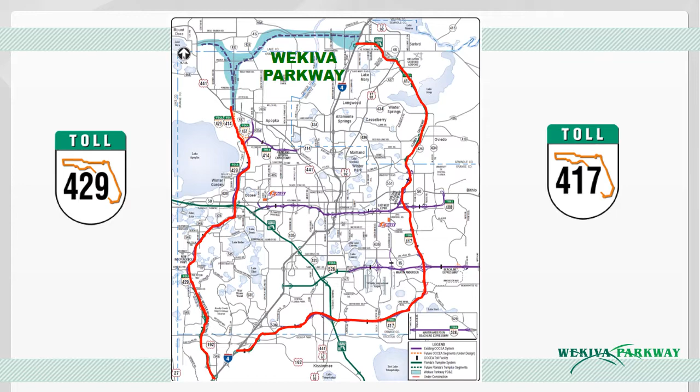The $1.6 billion Wekiva Parkway, a 25-mile toll road, is being developed by the Florida Department of Transportation and the Central Florida Expressway Authority. The Florida's Turnpike Enterprise will collect the tolls on the FDOT sections. The Parkway will include a number of non-toll road improvements, including the sections we're focusing on tonight.

The agencies will be widening about 7 miles of State Road 46, rebuilding the US 441 State Road 46 interchange in Mount Dora, moving part of County Road 46A out of the Seminole State Forest so wildlife can move safely between habitats, and building parallel, non-tolled service roads for local travel. The department also will be including a multi-use trail along much of its portion of the Parkway.

The Parkway is expected to help spur significant economic development, including creating nearly 36,000 jobs, both directly and indirectly, during design and construction.

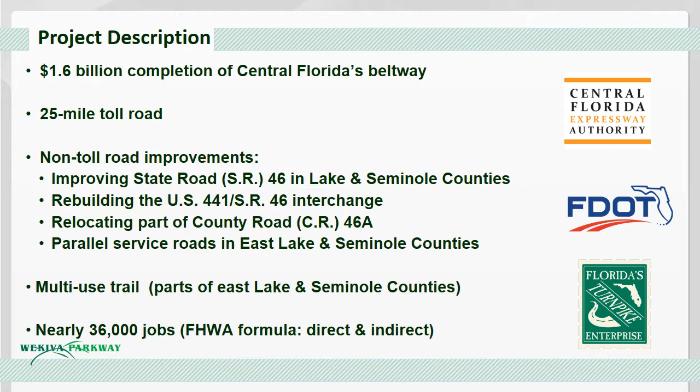The Wekiva Parkway represents a unique transportation solution that also helps to protect wildlife and other natural resources in the Wekiva River Basin. The agencies have diligently adhered to the 2004 Wekiva Parkway and Protection Act, including buying 3,400 acres of land for conservation and planning 4 substantial wildlife bridges. The Parkway will have a minimal number of interchanges. The idea is to reduce the amount of related development in this environmentally sensitive area.

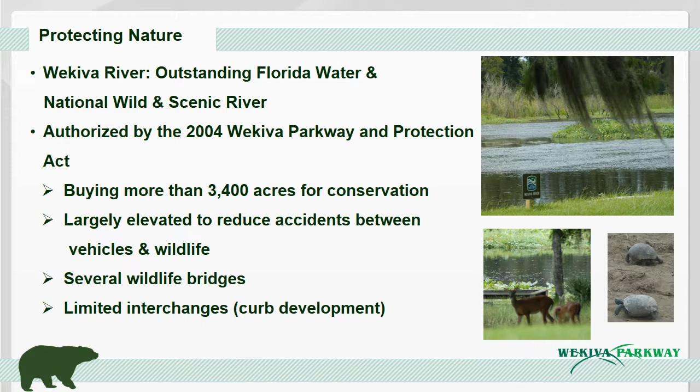Some of the environmental protections can be seen here on the first sections of the Parkway, sections 4A and 4B. On the right is a wildlife jump out that will allow animals who wander onto the corridor to safely exit. On the left, bat houses provide shelter to as many as 1,200 animals each. The floodplain bridge in the middle of this section during the dry season allows animals to pass under the Parkway safely. Wildlife fencing is 10 feet tall with 2 feet underground to discourage animals from digging into the corridor.

This section opened on January 20th, 2016. It was built on one of several large parcels that were purchased for conservation as required by the 2004 Wekiva Parkway and Protection Act. Lighting will be installed only in limited locations along the project to preserve the natural look and dark skies initiative for this environmentally sensitive area.

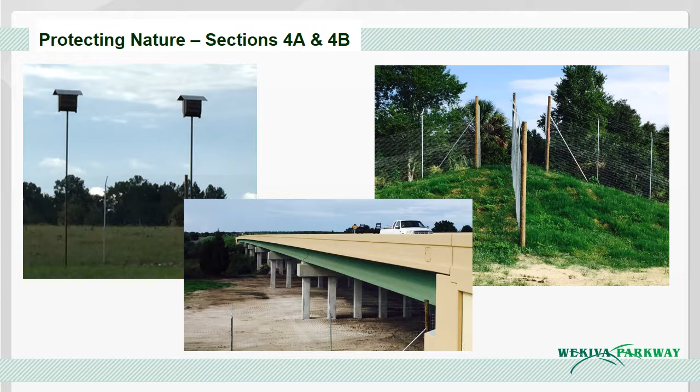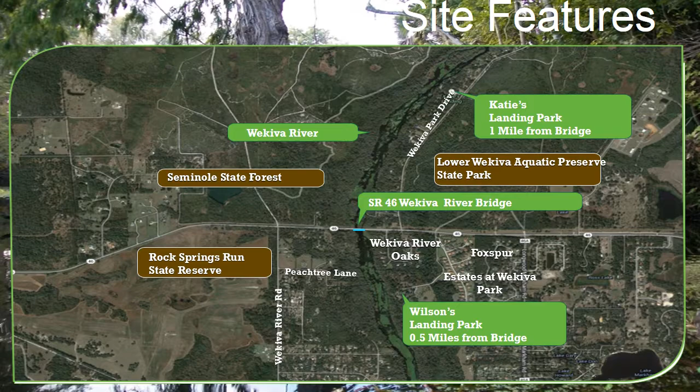The Florida Department of Transportation is developing a trail that will parallel about 10 miles of the Wekiva Parkway. The trail is being built as part of the overall construction on sections 5, 6, and 7A. A separate project will build the trail along sections 4A and 4B beginning in 2020. Once complete, the Parkway Trail will connect to future extensions of the West Orange and Seminole Wekiva trails, as well as connect to the new Lake Wekiva Trail being planned by Lake County.

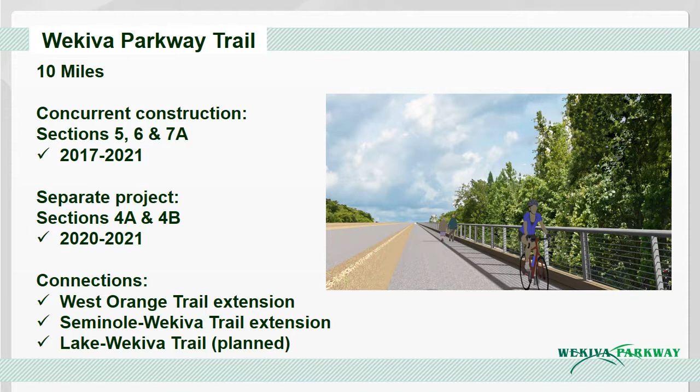The Wekiva Parkway is the first expressway in Central Florida to feature all electronic tolling. There are no toll plazas. You do not need cash on the Parkway. Both FDOT and CFX have programs to accommodate those who do not have a transponder.

All electronic tolling, or AET, enhances safety by eliminating the weaving between different lanes at toll plazas. It also maximizes convenience. Customers pay their tolls at safe highway and ramp speeds without having to slow down or stop. You can find out more about all electronic tolling on the WekivaParkway.com website.

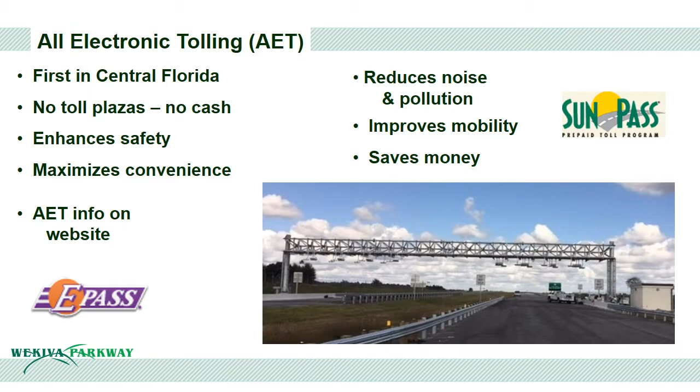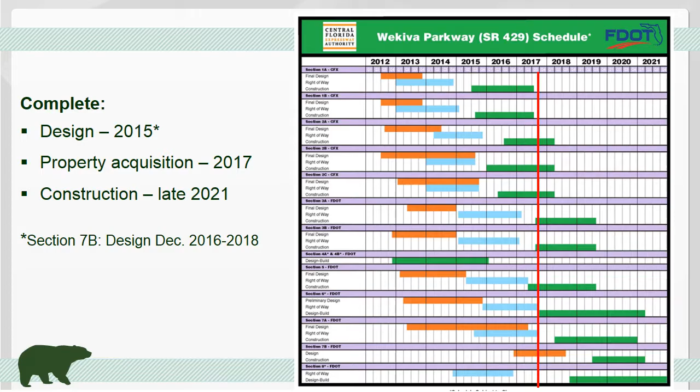CFX is on track to open the next sections in the spring of 2018. Basically, the plan is to have a new section open every year or two until all of the parkway is open to traffic by the end of 2021.

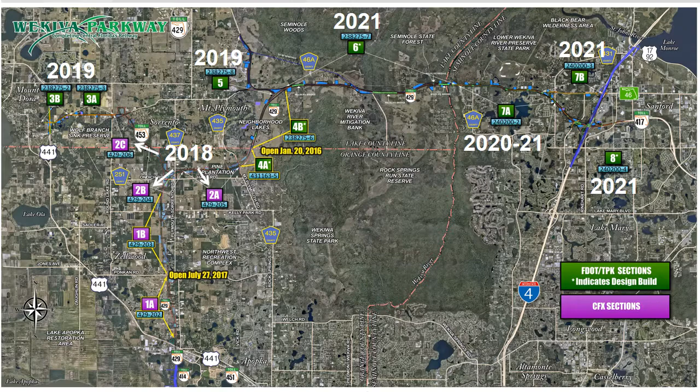So now we'll focus on the construction about to start on the Section 6 Design Build project in East Lake County and part of Seminole County. FDOT anticipates starting construction on this design build project in October, with work scheduled to finish in the spring of 2021.

This $240 million project extends about 6 miles, largely along the State Road 46 corridor from State Road 429 in East Lake County to west of Longwood-Markham Road in Seminole County.

FDOT has hired the firms you see here for this project. RS&H will oversee the daily operations for the department. Superior Construction, the contractor, and its design partners shown here are finishing the design and building the project.

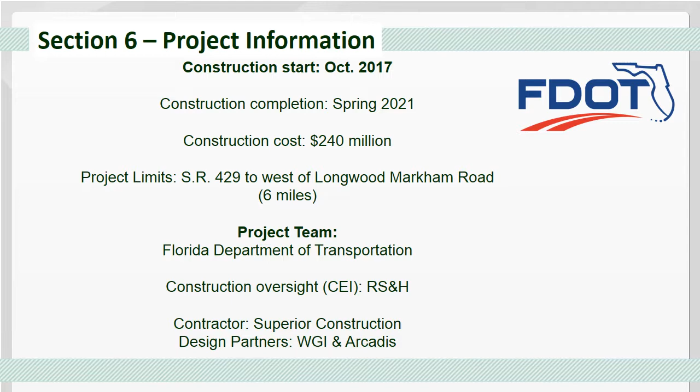Here you can see the Section 6 corridor, which begins in Lake County. Section 6 is the longest Parkway section, at about 6 miles long. This design-build project will largely replace State Road 46 with the elevated Parkway and a parallel non-tolled service road for local trips.

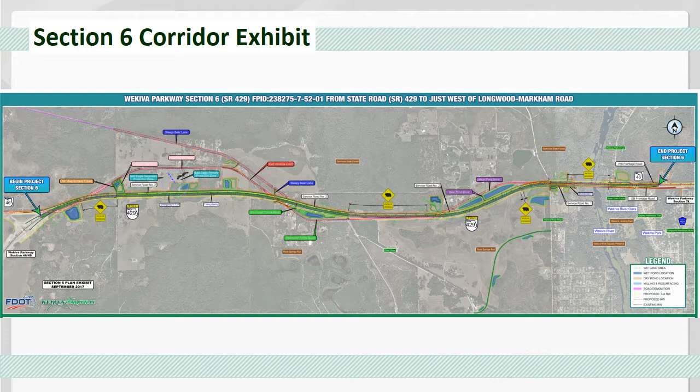The non-tolled service road will feature one lane in each direction. Due to the length of Section 6, we've divided it into two to highlight the various features. This graphic features the west end, starting where it connects to Section 4B or State Road 429, which opened in 2016.

Just east of that interchange, you can see the first of 3 wildlife bridges planned for this section. The wildlife bridges will allow animals to safely cross between the Seminole State Forest and the Rock Springs Run Reserve seen here. You can also see the non-tolled service road on the north side of the Parkway for local traffic.

An all-electronic toll gantry will be located on this section to allow motorists to pay their toll while driving at safe highway speeds. There are a number of short connector roads that will be built as part of this project to maintain property access. The Wekiva Trail will continue along this section.

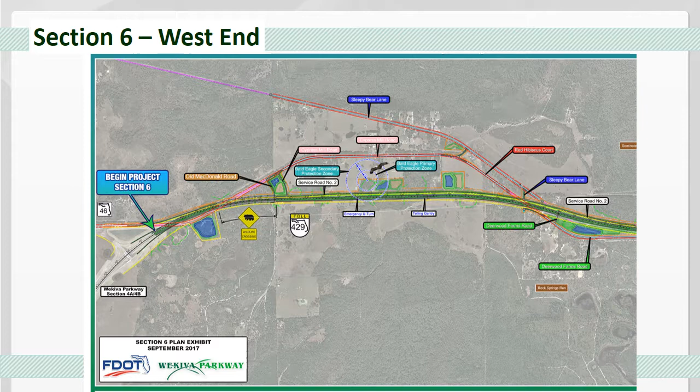This graphic depicts the eastern half of Section 6. Here you can see the 2 other wildlife crossings, as well as the greatly enhanced bridge planned over the Wekiva River. The new river bridge also will provide expansive areas for wildlife to pass safely under the parkway along the riverside.

Currently, the 2 wildlife tunnels on State Road 46 give animals a total of 79 feet of safe passageway. The 3 wildlife bridges and new Wekiva River Bridge will provide 7,700 feet of safe crossing area for wildlife, almost 100 times more passage.

The graphic also shows you how the non-tolled service road shifts from the north side of the parkway to the south side of the parkway at Wekiva River Road. The Wekiva Trail will be alongside the service road.

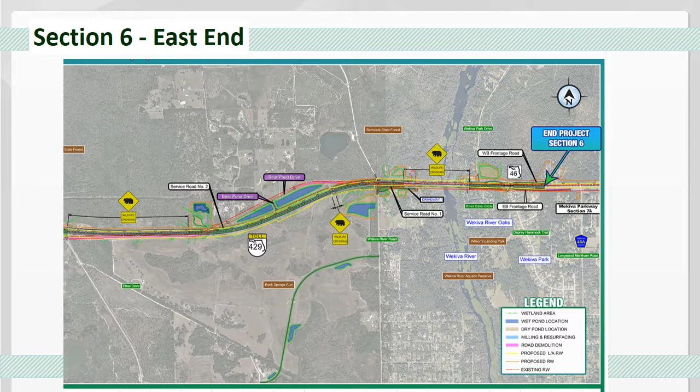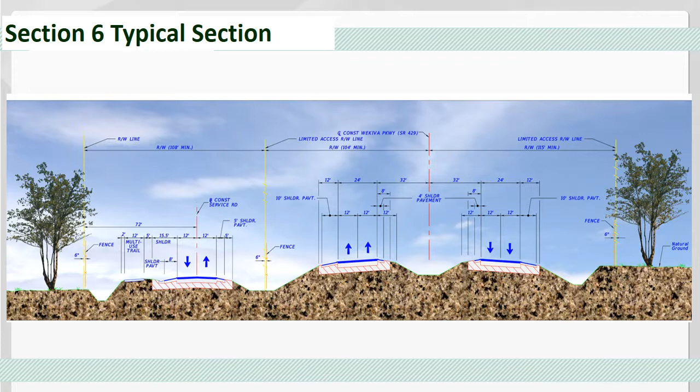The department has coordinated extensively with the National Park Service and other federal, state, and local environmental agencies and advocates to make sure the new bridge over the Wekiva River has a context-sensitive design, that is, one that attempts to fit in with its natural surroundings. The National Park Service in 2015 issued the final environmental permit needed to build the bridge based on this design.

The bridge will have a much higher profile than what's currently there. It will be about 60 feet high so that it is buffered by the tree canopy. The bridge will also have a gentle arch and other aesthetic treatments so that it's more pleasing to the eye. This animation shows a comparison between the current and future bridges.

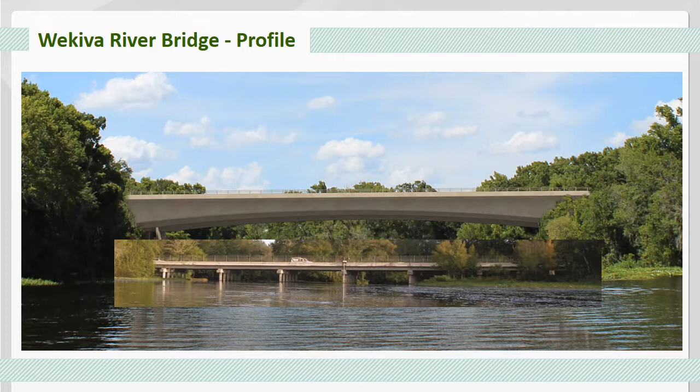This schematic gives you a clearer comparison between the existing bridge and the new one. The existing bridge will be removed. Removing the old bridge piers is expected to improve the river's flow or hydrology.

The greater openness of the new, much longer span over the river will greatly enhance the recreational experience and provide much greater and safer passage underneath the bridge for area wildlife.

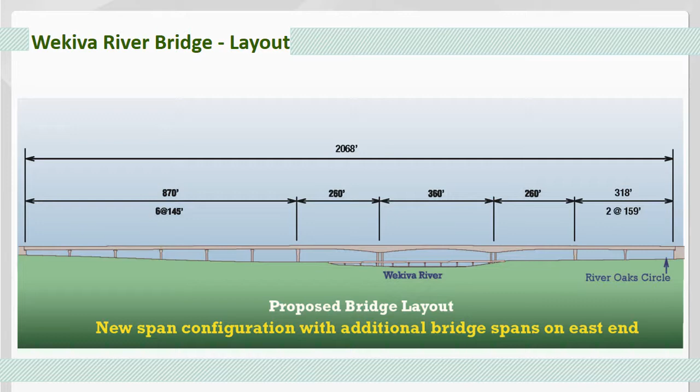This image gives you the river user's view of the planned bridges. There will actually be 3 bridges crossing the river, one each for the eastbound and westbound lanes of the Parkway, and the 3rd bridge, shown here on the left or south side, for the service road and trail. Also shown are aesthetic treatments, concrete forming mimicking interwoven tree trunks to enhance the experience of those using the river.

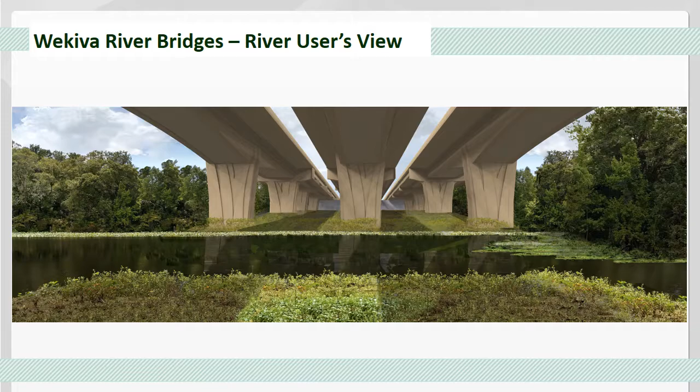The cross-section shows a potential ultimate build-out of 6 lanes. The initial parkway will only have 2 lanes in each direction, or 4 lanes. You can also see the multi-use trail on the service road bridge here on the right.

The top image shows the cross-section at the middle of the main span. Note the shallower bridge box structure. The image on the bottom shows the deeper box structures on the ends of the bridges where the piers will be located. This will give the bridge the gentle arch that will be seen from the river.

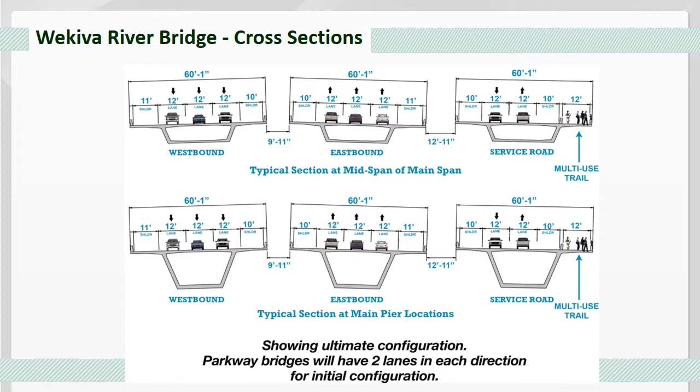The design build team has included some innovations and new features for the project. New scenic overlooks have been added to the plans in 4 locations near the wildlife bridges. The overlooks will provide enhanced opportunities to view area wildlife and habitat. The latest plans also include modified pedestrian railings, again to make it easier to view the natural surroundings. The goal in each case is to enhance the trail user's experience and to provide greater access to the area's state-owned lands.

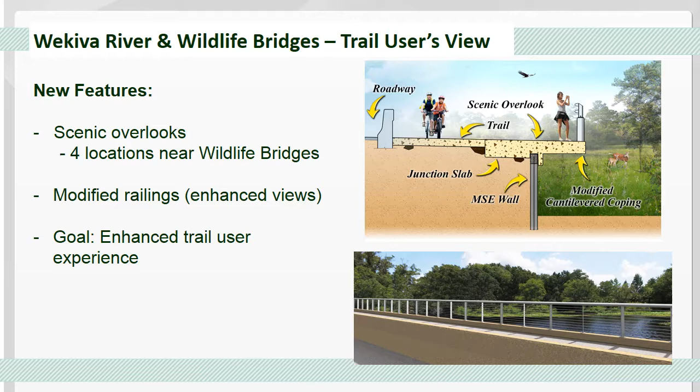The design build team also plans to move the location where the non-tolled service road shifts from north of the new State Road 429 to the south side of the expressway. The previous plan included shifting the service road to the south between the 2nd and 3rd wildlife crossings, the image shown on the left. By moving that shift to Wekiva River Road, FDOT will be able to eliminate that previously proposed bridge and related retaining walls.

The new design also allows room to provide a left turn lane for westbound service road traffic trying to turn onto Wekiva River Road. Removing the bridge also means the expressway can be 2 feet lower in the previous crossing location, reducing the amount of fill needed and also saving money.

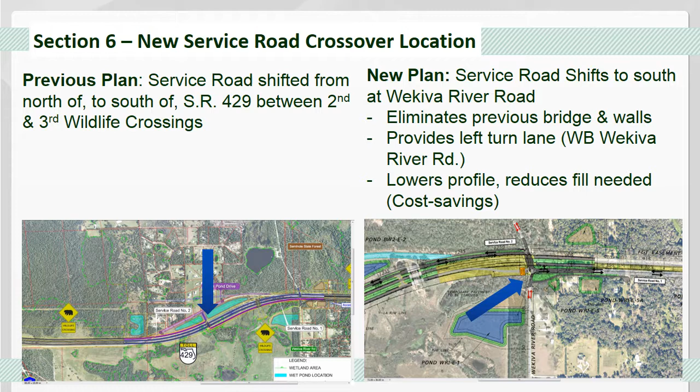The design build team found ways to help protect a bald eagle's nest along the project. The new plan includes moving the toll gantry about 1,400 feet to the east. This gets it out of the nest's secondary protection zone. The move also reduces wetland impacts.

Plans also include reshaping the nearby retention pond to get the slopes out of the nest's primary protection zone. This change also removes construction impacts from some wetlands.

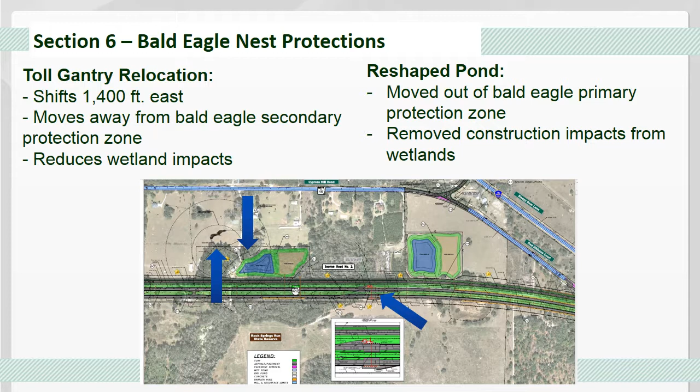Now we'll share some of the construction phasing and other details for this major project.

Motorists can expect lane closures, detours, as well as other construction impacts. Noise, dust, and vibration are unavoidable byproducts of construction. Night work also will be needed at times. We will do what we can to try to minimize these impacts.

Motorists should always obey the posted speed limits, safety signs, and devices in the work zone. Drivers should be mindful of construction vehicles entering and leaving the roadway.

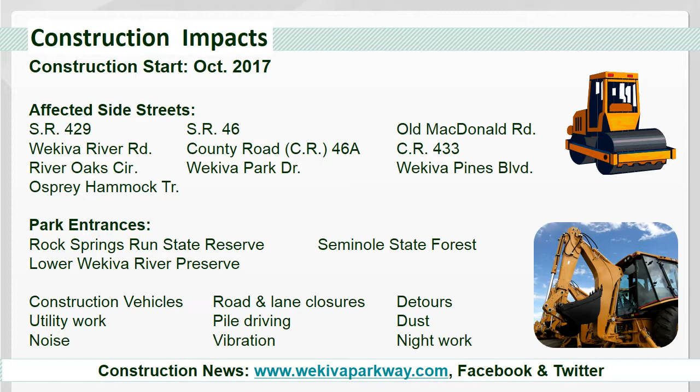We will provide the community with advance notification of lane and road closures, detours, and night work. The department posts important traffic news on the WekivaParkway.com website and on the Parkway Facebook and Twitter pages.

The goal of Phase 1 is to build areas of the project that are not currently under traffic. This phase will include clearing along the Wekiva River and the rest of the corridor. Traffic will remain on existing roadways throughout this phase.

On the west end of the corridor, work will include building temporary fence to guide wildlife to existing tunnels. Crews also will install temporary pavement to shift traffic in future phases. Work will begin to build future connections between State Road 46 and County Road 46A.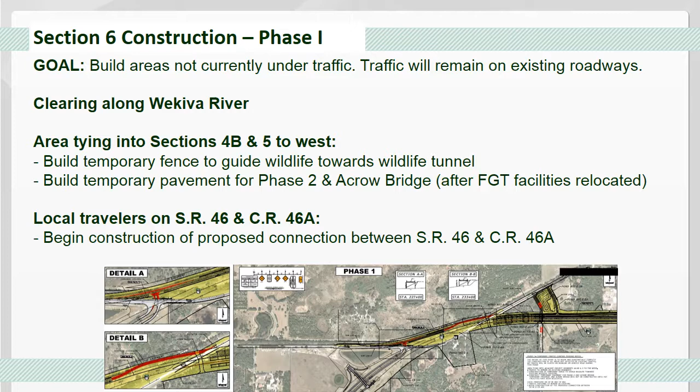This image shows activities for the middle portion of Section 6, in the area where State Road 46 and County Road 46A currently meet. Again, the focus will be building areas not currently under traffic, as well as the connections between State Road 46 and County Road 46A. Traffic will remain on the existing roadway.

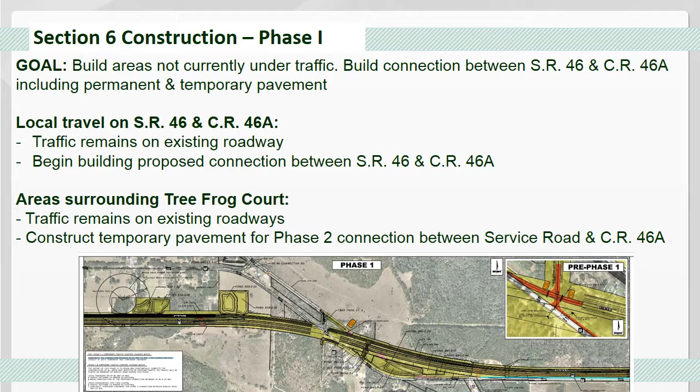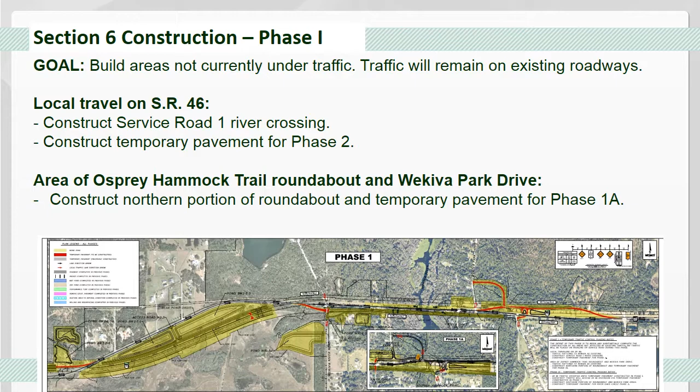This image shows Phase 1 activities on both sides of the river. Work will include building the bridge for the service road, as well as beginning to build the roundabout at Osprey Hammock Trail and other activities.

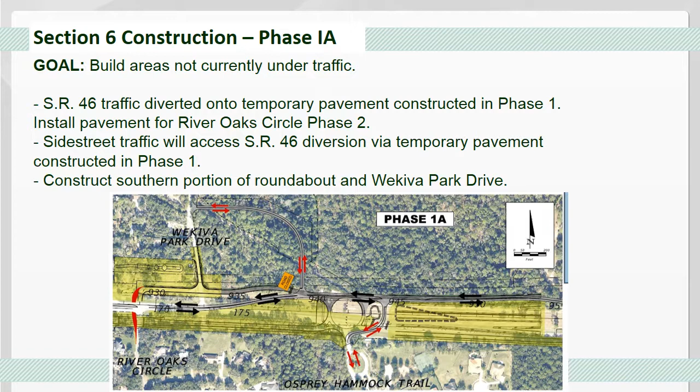In Phase 1A in Seminole County, State Road 46 traffic will be diverted onto temporary pavement built earlier. Crews also will begin to install pavement for the next phase of work at River Oaks Circle. Side street traffic will access State Road 46 via temporary pavement. Crews will build the southern portion of the roundabout and Wekiva Park Drive.

This image shows Phase 2 work on the west end of Section 6. During this time, crews will begin shifting traffic onto the service road so they can work on the existing roadways. Work will begin on Wildlife Crossing Number 1, as well as on the Mainline Parkway in this area. Motorists will travel between State Road 46 and County Road 46A via the new connections. Lane closures and flagging operations will take place in this phase.

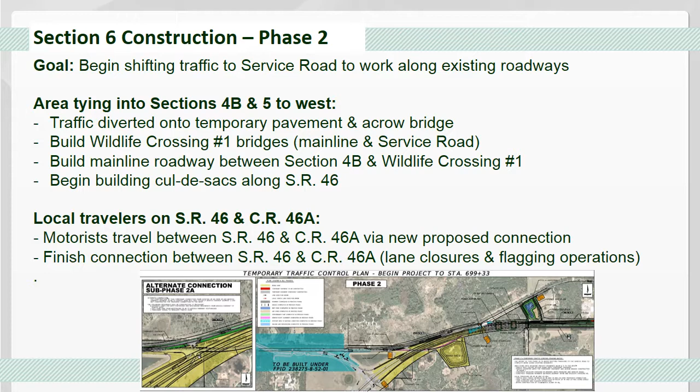Phase 2 activities in the area where State Road 46 currently meets County Road 46A include shifting traffic onto the service road to work on existing roadways. Travel between the two roadways will be via the newly built connection. Crews will begin building cul-de-sacs along State Road 46. They also will install a temporary traffic signal at the service road and Tree Frog Court.

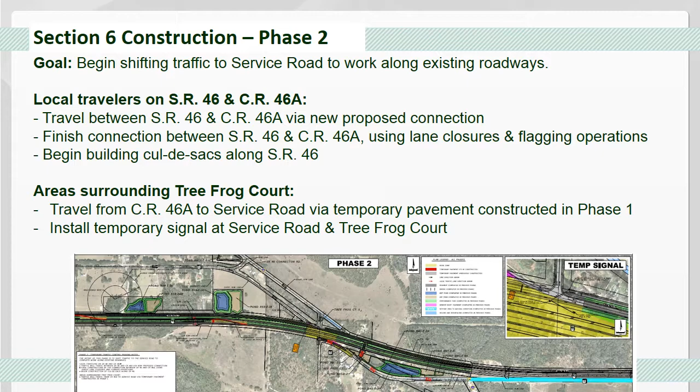Here we see the Phase 2 activities in the Wekiva River area. Traffic will be diverted onto temporary pavement and the Service Road River crossing, as well as the Osprey Hammock Trail roundabout and the westbound frontage road. Crews will begin building the eastbound parkway near Wildlife Crossing Number 2, the Wekiva River Road crossing, and the Mainline River crossing. In the area of Osprey Hammock Trail, side street traffic will be routed through the roundabout and temporary pavement at River Oaks Circle.

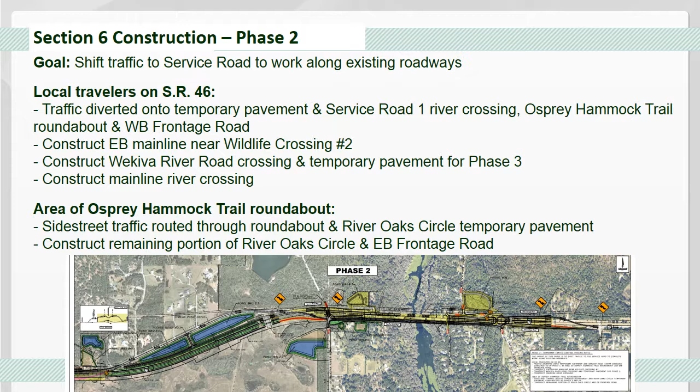Phase 3 will involve finishing the remaining connections needed for project completion. On the west end at this time, Parkway traffic will be using what eventually will be the eastbound lanes. The service road will be diverted onto the main line. Crews will open the connection from Section 4B or State Road 429 at this time. The connection to Section 5 via the service road also will be completed.

Motorists headed west from State Road 46 will use the new connector road to get to State Road 429. Traffic on the local connector roads will be minimized. Work will finish in this phase on the cul-de-sacs and local roadways.

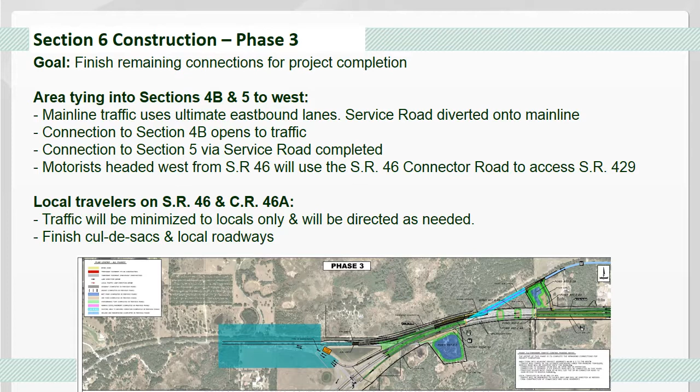For Phase 3 in the center portion of Section 6, traffic in the area of Tree Frog Court will be diverted from the Parkway main line to allow continued construction west of Wildlife Crossing Number 2. Remaining shoulder pavement and connections along Tree Frog Court also will be completed.

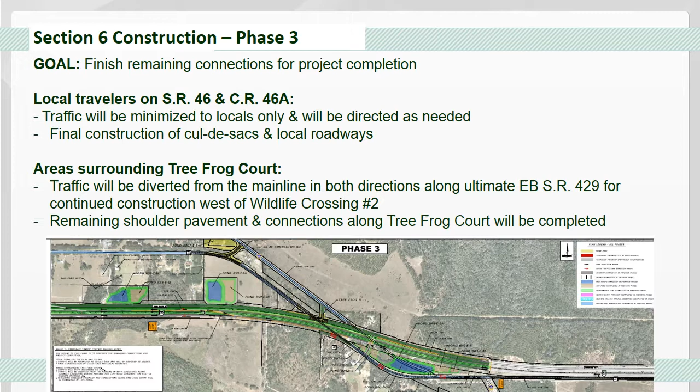This image shows some of the work in Phase 3 to maintain local access to both State Road 46 and County Road 46A. All temporary diversion and crossovers will feature the existing posted speed limits.

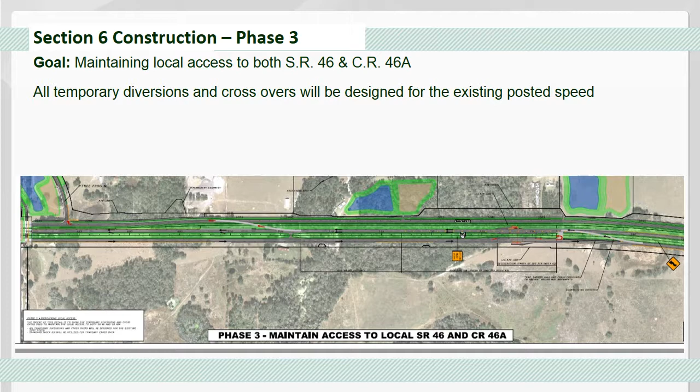For Phase 3 in the river area, State Road 46 traffic will be diverted to eastbound Main Line until Wildlife Crossing Number 3. Then drivers will use the Service Road river crossing. Side street traffic will access State Road 46 via the Service Road and a temporary connection near Wildlife Crossing Number 3. Crews will build the rest of the Service Road and cul-de-sacs. Work will take place on the westbound Parkway river crossing.

In Seminole County, eastbound traffic east of Osprey Hammock Trail will use the eastbound frontage road. Westbound traffic will use the westbound frontage road. Other activities will include finishing building River Oaks Circle.

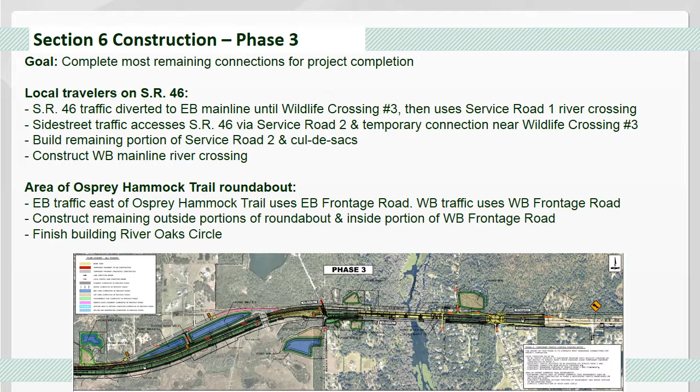Phase 3A involves finishing the remaining connections needed for project completion. State Road 46 traffic will be maintained on the Service Road. Crews will build the rest of the eastbound main line near Wekiva River Road, as well as the remaining mainline bridges. Work also will take place on the interior portions of the Osprey Hammock Trail roundabout.

Since the Wekiva River is a national wild and scenic river and Florida outstanding waterway, there are significant steps that must be taken to protect the river during construction. A top-down construction method will be used to minimize river impacts. Following is an animation showing the top-down construction process.